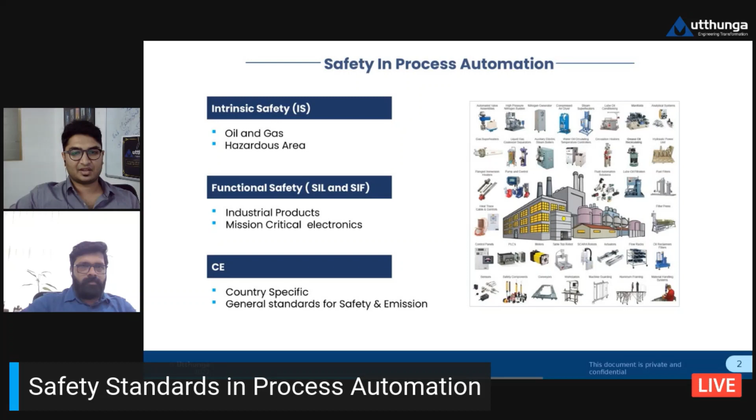So that's not a major incident or something that's likely to be certain degree of fault tolerant by design, using guidelines that follow some good practice. It may be how we can ensure that the design will not create any failure, and how we can ensure with following certain practices to have a safe design, so that it will not create any safety threat.

SIL 2 is a little higher level compared to SIL 1. That is to avoid more serious but limited incidents. So that is also mostly focusing on the design aspects, how we can ensure that with any fault or any other design issue, it should not create any major injury, like risk of death, or any other major critical issue for the business or the assets.

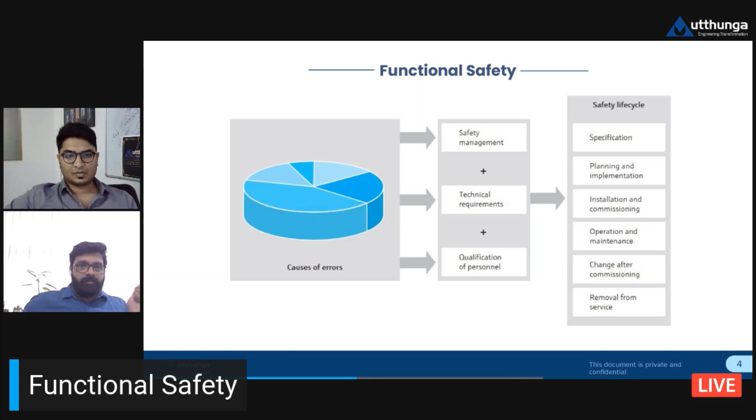Okay, so to summarize, you mentioned IEC 61511, which is applicable mainly to this industry, and there are similar standards applicable to their respective industries. The safety integrity level, depending on the use case and application, is split into these four levels, like you said. So probably now we can go on if you want to add some points.

No, this point is covered, but it's actually derived from a parent safety standard, IEC 61508. That's a functional safety standard. End of the day, functional safety is describing something like avoiding any injuries. It should not create any safety threat in terms of people, or create any severe damage to the investment, infrastructure, or the plant. So in automotive, we talk about ISO 26262, but the parent safety standard is IEC 61508.

Got it, got it, cool. So yeah, I think we have a good overview on functional safety. Now let's probably jump into the second aspect you previously mentioned, the intrinsic safety portion. Can you give us a brief on the intrinsic safety side, and is there any similar classification like what you mentioned for functional safety?

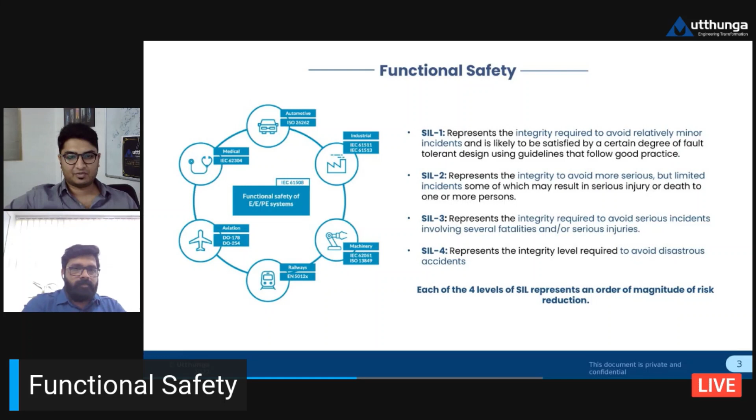That is also based on IEC 60079 standard. So IA means highest protection, for the most hazardous area, zone zero. Take an example of a gasoline station where you're filling petrol or any other oil into a container—there are a lot of fumes present, so there's a 100% chance of getting a flame that can ignite any electronics or systems. So when designing the system, it should not create any kind of electrical energy to the atmosphere that could trigger any ignition. That's what intrinsic safety level is all about.

So that is again classified into IA, IB, and IC. IA is mostly where 100% inflammable contents are present, IB is most likely, and IC is very occasionally where inflammable contents are present. Based on that, there are design criteria also, for zone zero, zone one, and zone two. So IA means the highest protection is for the most hazardous area, basically two countable faults.

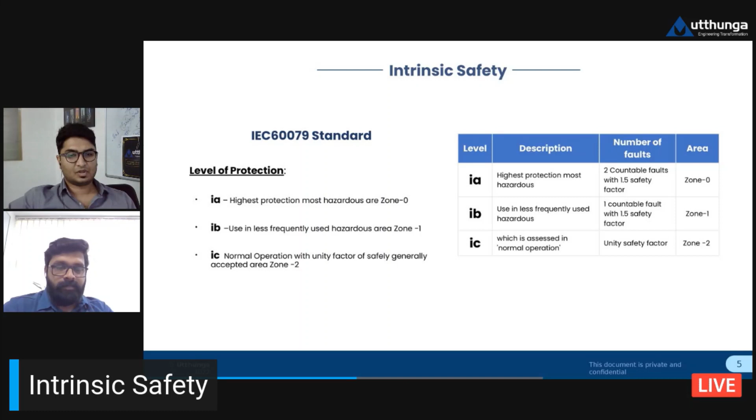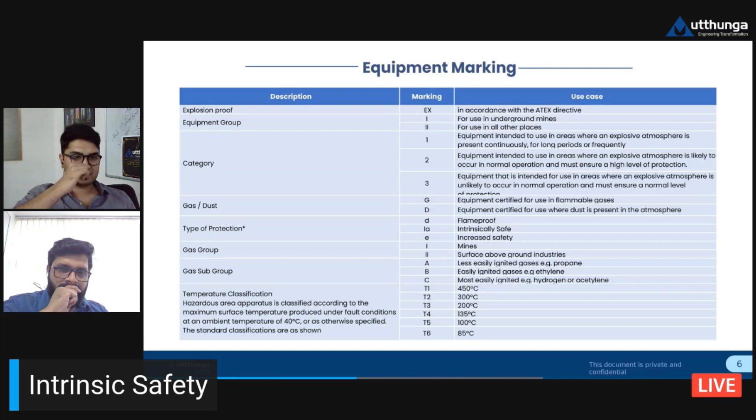So you mentioned about a few things there, right? Like in terms of the categories and all of those things. Maybe it will even help the audience if we understand how that individual categorization, as well as how that in turn comes about when a system or a process is intrinsic safety certified. How does that translate into the actual marking itself, and what goes into that?

So Nithin, that's a very big topic to cover in this 30 minute slide, definitely. But what I can do is go through this particular slide here, and we can have a very detailed session about this.

Explosion proof marking definitely starts with EX. As I indicated, it has a subgroup, basically one or two. For use in underground mines it's one, and basically in other places it is two. So generally we can see EX2 — any marking for people using it in outdoor applications comes with an EX2 marking in the beginning. Then again category 1, 2, 3.

This we have already discussed. Category 1 means it includes the area where explosive atmosphere is present continuously. Say example, if you are in a gas station where you are filling the gas, there is 100% chance that inflammable components are present. So that's category 1.

Category 2 is something like the area where explosive atmosphere is likely to occur in normal operation. So in normal operation it may not be a chance — maybe some area where you are using a safety valve and transferring gas from one station to another, or any inflammable component. But in those cases, sometimes because of a loose contact or some other reason, if the gas leaks, that can cause an explosion — that comes into category 2.

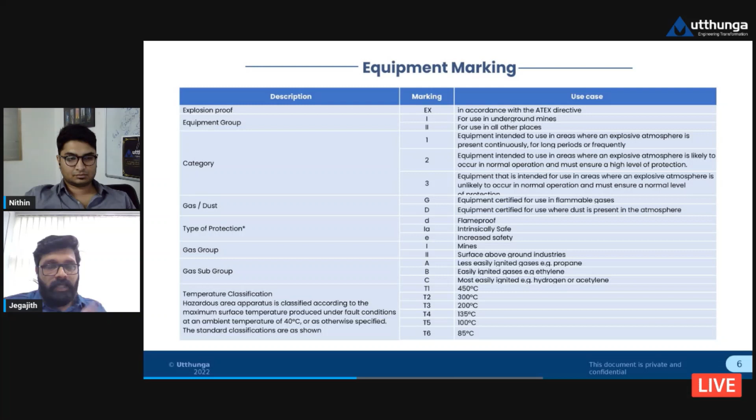And again, the gas group — there are sub gas groups, and there are temperature classifications, various temperature levels based on the operation range that can vary from 85 to 450 degrees. So I would assume, after that entire process, this is how it would look, right?

So if you open any intrinsically safe design in process automation, it could be any gas transmitter, IO module, or barrier, you'll see similar kind of marking. The audience can refer to this slide later to see exactly how this marking is classified. By reading this marking, you can make out what kind of design it is, where exactly it is designed, and even the accredited laboratory that put this marking.

Got it. Great. So now I think we understand at a high level the nitty-gritty of what goes into it. But considering a large portion of our audience is from the engineering side, and a lot of these industrial OEMs are building products along these standards, it will be good if you can give us some details on understanding the design process and approach you typically take when designing products to meet these standards. That would help a lot of us.

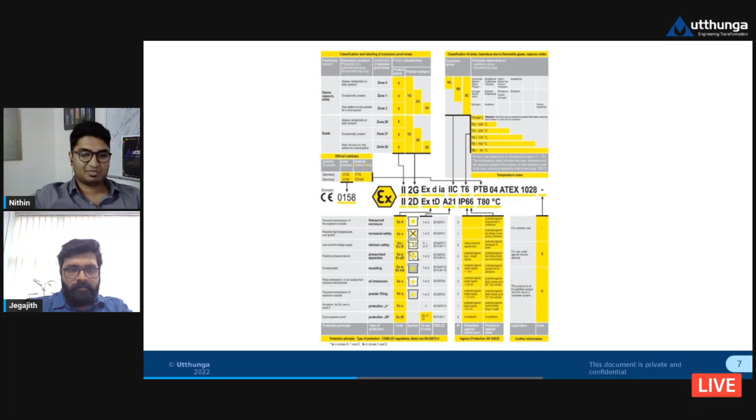On the safety side, on the mechanical side we need to be sure about what kind of chassis or enclosure we are using, because we discussed a few slides back about the chassis. If it's explosion proof, what kind of chassis and what kind of shielding we use, because that should not create any electrical discharge to the field. Similarly material selection, whether SS or MS, and what temperature it can withstand in case of any flame. Similarly for the gasket and cover, because if any burning happens inside the enclosure, it should not discharge any hazardous gas or flame outside. On the grounding side, since most systems are electrical, we should have proper grounding and shielding, and be very careful with related chassis components.

Coming to the electronics, mostly on the schematics and PCB side, what kind of PCB? Because when we're talking about intrinsic safe aspects, there are multiple ways of doing that, and each zone level needs to be classified. When designing the PCB, we consider number of layers, stack up, and separation of ground. These things are already defined in the standards, so based on that we need to address all these aspects in our electrical designs.

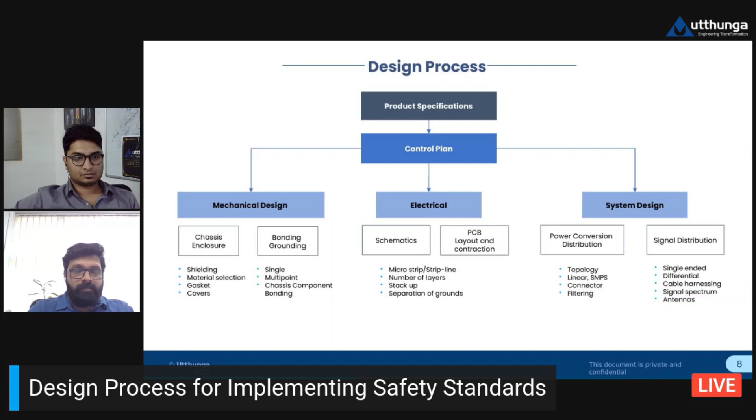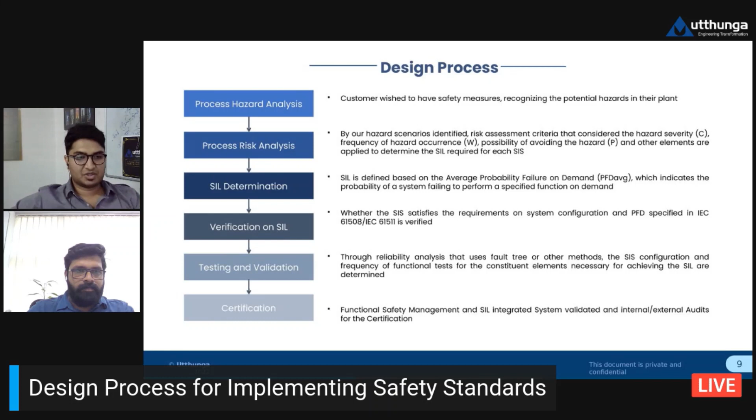Got it, understood. So that's a high level overview on how the individual functional aspects of electrical, mechanical, and all of that play a role, with the individual things coming together.

In terms of the actual process itself, can you give us some more details from the analysis to the certification, the full life cycle of how that goes about, and what really goes into some of that analysis? That will be helpful as well.

Yeah, so let's talk about the functional safety process. Again, this is very limited content, but this is the way we generally design. This is a scenario of a new design, basically when you're in the stage of new product development.

First you need to understand the hazard analysis - it's a safety measure recognizing potential hazards in the plant. When talking about a water bottling plant versus an oil and gas industry, it's easy to differentiate the hazardous level. In oil and gas, more inflammable gases are present, but in a mineral water plant you have to take care more about contamination of water. So we should understand the process and have an understanding about the hazardous level.

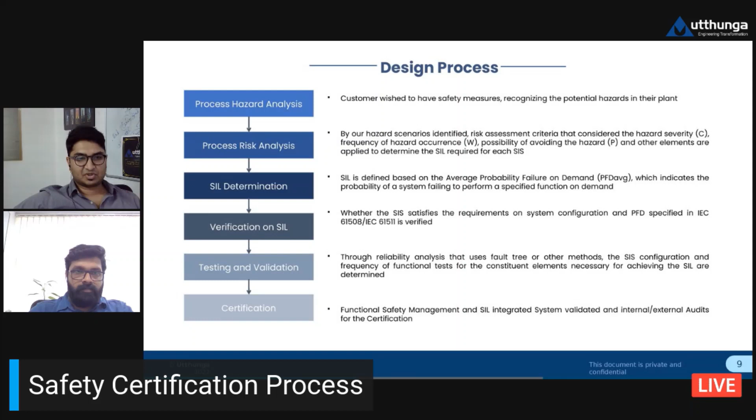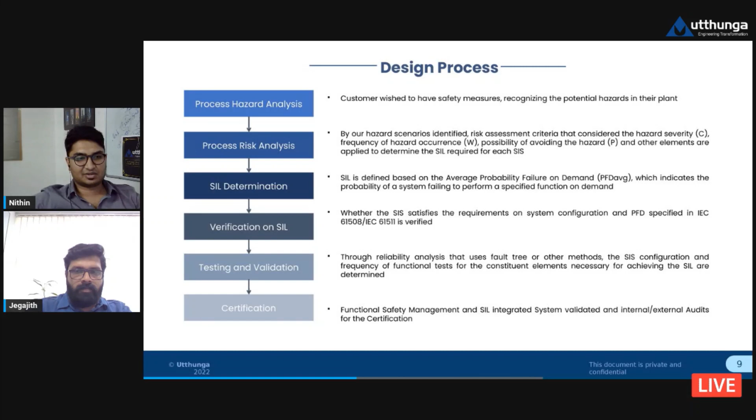Understood. So now that you've gone through the entire design process and explained what goes into each of these sub-processes, it will be good if you can give us more inputs on the specific process related to the certification side of things - some more details on how the certification process itself works, what goes into that, and what are the typical activities that happen through this process.

I'll take an example which you discussed, the intrinsic safety certification process. This is one example or use case. There are two processes - one in the design stage, another in the production stage. As discussed previously, we have a hazardous analysis where the category is determined. This is a typical process we follow.

First we do internal control of production, and once that's done we create the technical file. Once the technical file is created, we go for conformity - based on internal production, with an external agency we do product testing. That goes for conformity with the certification authority. Once the certification authority process is done, we go for unit verification, and that is a closed loop.

And finally, what happens? You get the IECEx marking. This is divided into design and production. In the design stage, we need to take care of all these examinations as per the standard. The annexure specification is as per the standard for intrinsic safety aspects. When it goes into production, we also need to see all the aspects in terms of quality assurance for all zones, like zone 0, zone 1, and zone 2. We can follow this kind of process.

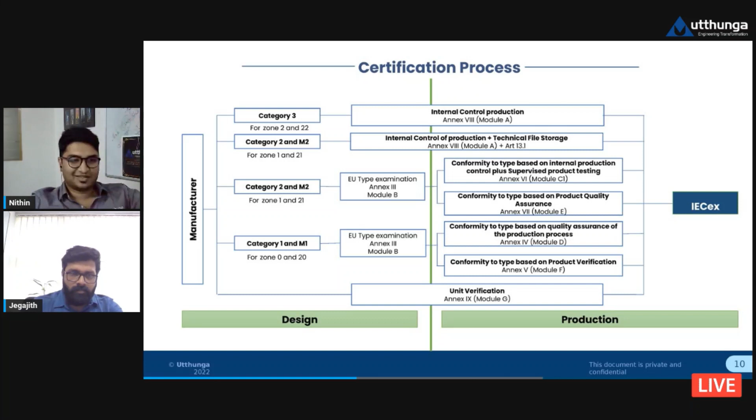Yeah, I just want to touch base on that, because the audience may feel that safety is only about functional safety or intrinsic safety, but safety is not limited only to those standards. There are multiple other standards involved in safety when it comes to the process automation side.

I really want to share about the CE side. CE is the European conformity marking, which you can see on almost all products. CE consists of two elements, and at a very high level, we can discuss the EMI/EMC electrical aspects, which is based on the product. CE could be applicable from a toy car to an aircraft system. There are various components and standards involved, but I'm not going into detail.

One is the electrical aspects, and the second is the environmental aspects. Electrical aspects means it's talking about the noise level, because the device we've designed should not disturb other systems, and similarly other systems' noise should not impact our device. That's the noise level aspect. Similarly, we should not use any hazardous component inside the system, so that tomorrow when it's recycled, it should not create any pollution to the earth or environment.